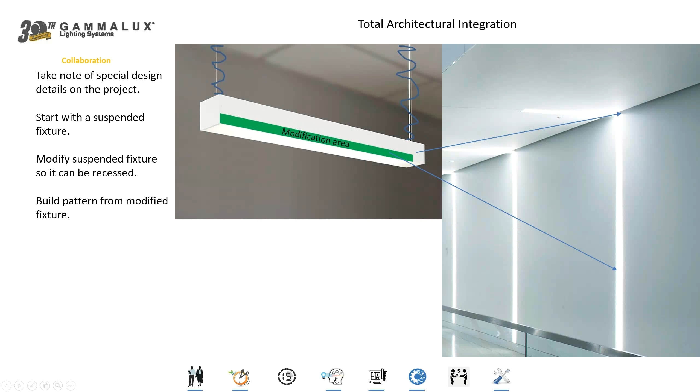So rather than using a recessed fixture in an application like this, what we do is we take a suspended fixture with smooth sides on it, and we modify that suspended fixture so that it could be recessed. But we don't modify the small portion of the fixture that will be visible up inside the little 3-inch gap. And by doing that, we allow for a very clean aesthetic in the space without the problems associated with putting a recessed fixture into an exposed condition.

And of course, the end result is a very beautiful installation, the kind of thing that helps people to build their business and build their reputations. So we try to build fixtures while being conscientious of what's going on in the space. This is why it's very important for us to understand what's happening in that space so we can figure out the right way to modify the fixtures as necessary.

So what ends up happening is sometimes errors are made on the order, and of course this causes delays at the job site, or parts and pieces can't fit together properly because they've been ordered as a bunch of individuals and T or X or L connectors, and they weren't really designed as a comprehensive unit. So because Gammalux tries to deal in totality as comprehensive lighting systems, what we offer to the specifier is something we call a development drawing.

This development drawing is basically the same drawing that we would provide after a purchase order, but we're going to offer it before bid day. And what it does is it takes all of the elements of that comprehensive pattern of fixtures and provides one part number for the whole pattern. And by doing that, we're allowing for the most simple form of ordering possible, because that one part number includes all the various components that are required for that pattern.

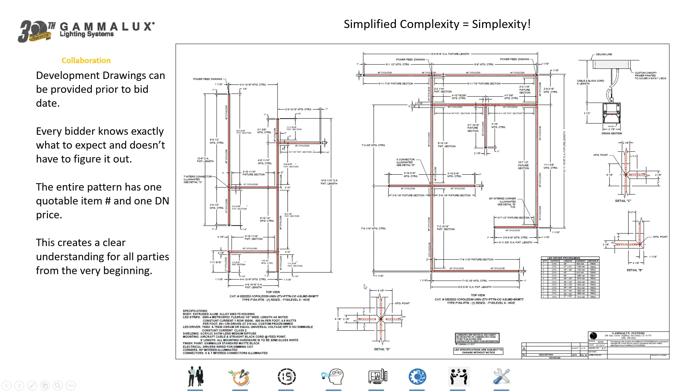Now, another thing this does for you, it simplifies, as I said, the ordering process, and it clarifies to the distributors and contractors who are bidding on this job that this is an engineered lighting system. It's not something that they have to try to put together, and this allows them to possibly do better work by understanding that this is already an engineered lighting system.

Now, everything we build at the factory is actually fully assembled twice before we pack it and ship it. And of course, this affects our lead time.

But it's necessary for us to go through these procedures so that we can ensure that all the housings line up the way that they're supposed to, making sure that all the joining mechanisms work the way that they should, of course, making sure that all the dimensions are accurate.

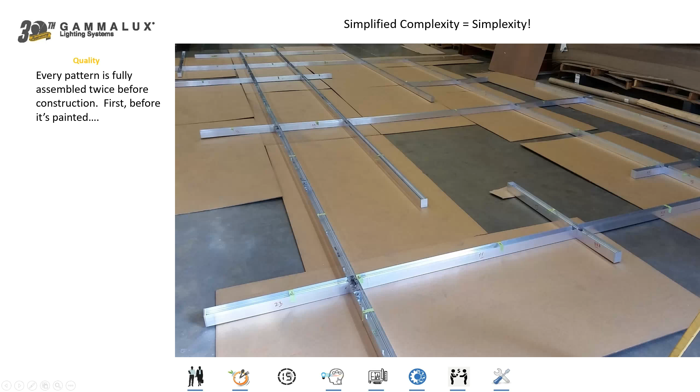Then we take apart that entire pattern of fixtures, paint it, then we put in the electrical and reassemble the entire thing as a comprehensive lighting system, checking every circuit, every battery pack. We're checking the consistency of the paint finish from one housing to the next. So by being very thorough in our methods before we pack and ship the fixtures, we ensure that everything looks and works the way that it should when it arrives at the job site.

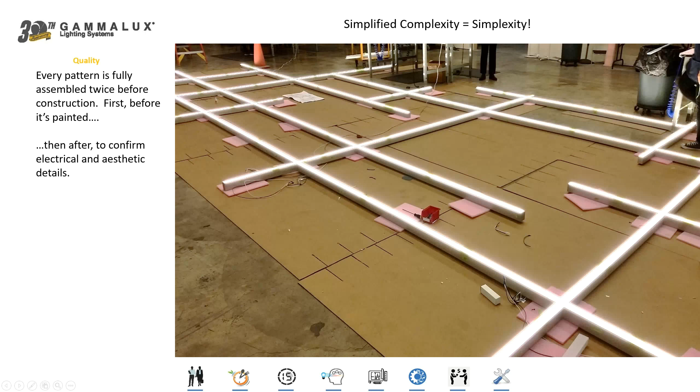Now, if we wanted to embed fixtures into a wall, usually you don't want to see that visible flange that goes around the pattern of fixtures, so you specify fixtures as flangeless. Well, those flangeless fixtures do have a flange, but it's a mud flange. It gets mudded over and painted so you can't see it. Well, we have the same thing as well.

We have a mud flange on our fixtures, but we actually separate that mud flange from our housing by a very small, about a 32nd of an inch expansion gap. Now, this is built in as part of our housing. It's not a separate back box that the contractor has to try to fit together. But by doing this, by building these fixtures with an expansion gap, it allows the housing to heat up from the LEDs or the fluorescent lamps.

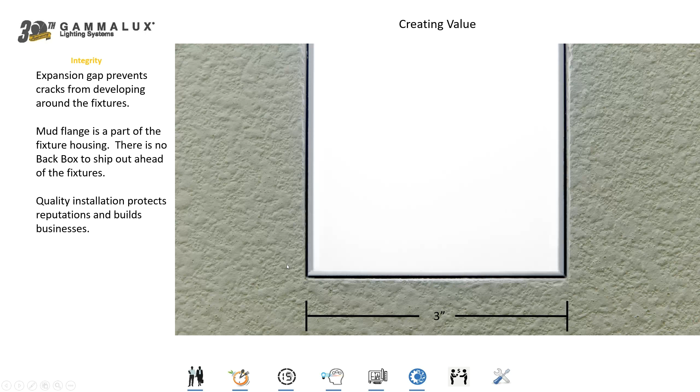It allows that housing to heat up, and when it expands from heat expansion, it doesn't put any pressure on the surrounding plaster. Or if the walls, maybe it's an exterior wall, and the walls are heating up, they're expanding as well. They don't put any pressure on the fixture. So by having expansion gap built in as part of our housing, we eliminate the possibility of those cracks developing around the perimeter of our fixtures. And of course, this helps you to protect your reputation for years to come on those jobs.

So, of course, if the fixtures are built that way, now it's the contractor's responsibility to remove that mud flange in the field, and then they have to cover up holes, and they've got to try to get touch-up paint to make it look pretty again. So what we do at Gammalux is we'll just build the fixture with the mud flange on the sides and the top, but not the bottom. So with proper collaboration, we can understand what's happening in the space, and then we know how to modify the fixture, and we do that at no additional cost.

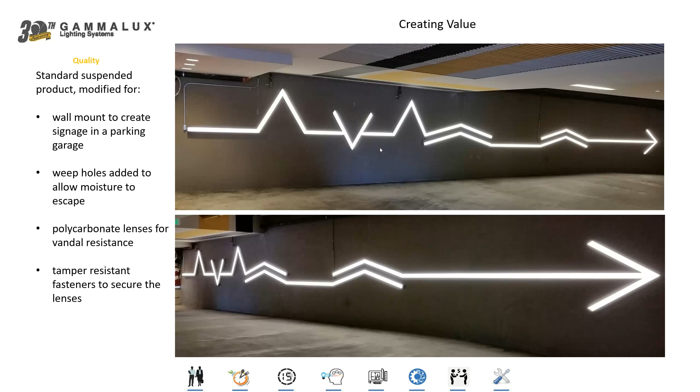We're not bound to 4 foot, 8 foot, 12 foot, or just 90 degrees and 45 degrees and such. We have all this capability. And again, these are not custom applications. Of course, we can make all of our continuous runs fully illuminated. All of our fixtures can be built as either individuals or continuous runs, or even in patterns as well.

Now, when we make these continuous runs, we're not bound to 1 foot or even 1 inch increments. We can actually cut our housings down to very small fractions of inches, and they will always be fully illuminated from end to end. To my knowledge, we're the only manufacturer left that's still able to make a 24-foot single-piece housing. Now, certainly our continuous runs can be built in any length, and there will be multiple housings in those continuous runs. But if you require a single-piece housing up to 24 feet long, we can do it.

Now, also, depending on the size or the shape of that housing, if it's a tall rectangular housing like we have here, it has a lot of rigidity to it. So we can actually support that entire 24-foot housing with just 2 cables. This cleans up the ceiling system, which is architecturally pleasing. It also makes things easier to order because now there's 1 housing to order instead of multiple, and then easier to install. Again, 1 instead of multiple. And you also eliminate the possibility of pinched wires as housings are being joined together. So having the ability to make a 24-foot single-piece housing is one of the things that sets us apart as a manufacturer.

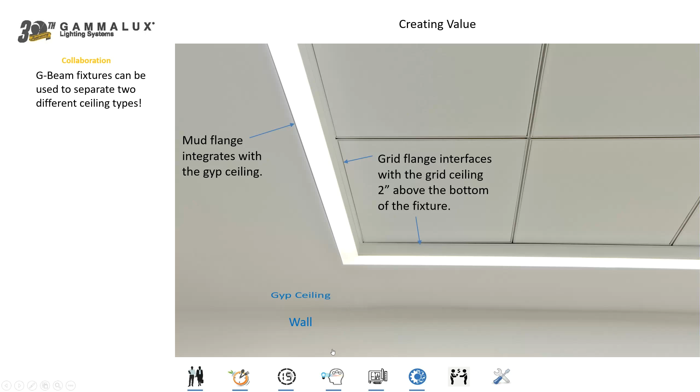Now, we can do this with any kind of ceiling system. It doesn't have to be gyp and grid. It could be metal, it could be wood, it could be stone, it could be poured cement. We can interface with many different types of ceiling and wall materials, even furniture systems, interacting between different elements in order to let the fixtures become an architectural feature and not just a lighting system. Of course, we can make our fixtures into wayfinding devices as well, coming up the wall and across the ceiling. And as you remember, we can do any angle, not just 90s and 45s.

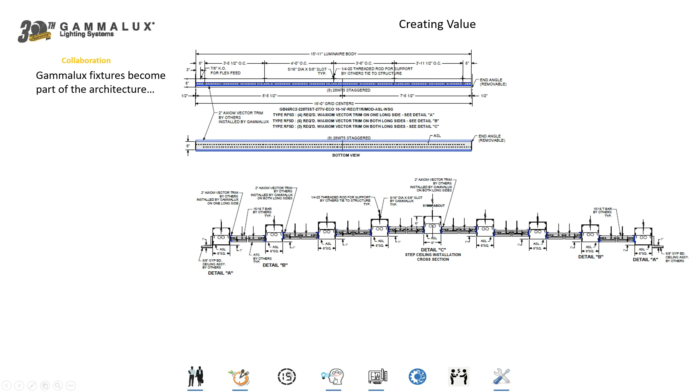In this application, we're making steps in the ceiling, but actually using the fixtures in order to accommodate that. You can see the fixtures are coming up to a point and then back down on the other side. Well, if you think about a step ceiling, there's a lot of complexity involved in that and a lot of question marks and unfortunately a lot of dollar signs associated with that kind of thing. But it doesn't have to be that case. See, what we did is we found out what the ceiling system is.

In this case, it was the Armstrong Axiom ceiling system, which uses an extruded aluminum C-shaped channel up against the walls. And of course, the grid slides along that C-shaped channel and then into the proper positions, and then the tiles are dropped into the grid.

So what we did is we got a hold of that C-shaped channel called the vector trim, and we attached it on the sides of our fixture at 2 different heights at the factory. Everything was cut to the same length, and then it was painted together so it all looks like one comprehensive element. Now, when the fixtures are installed in the space at the height and spacing that they're supposed to be, then the ceiling contractor gets there and just snaps the grid directly into the sides of the fixtures.

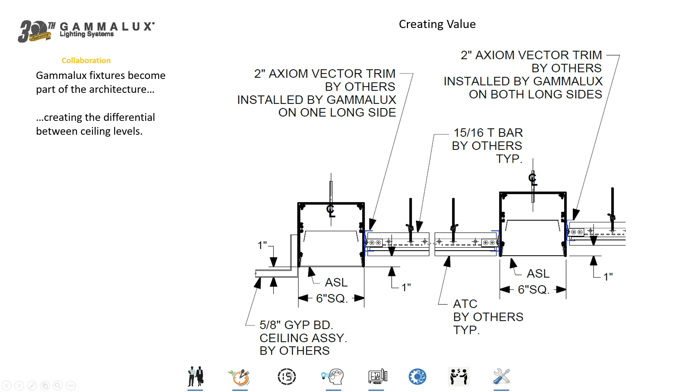The grid and the fixtures are independently supported, so they're not relying on each other, but still they interface with each other so that you have a very clean aesthetic and a beautiful installation in the space without all the dollars associated with custom construction.

At the end of that job, the contractor sent congratulations back to the lighting designer, who insisted on using Gammalux because we are into the fine details. We have the conference calls necessary with all the players to ensure that we have all the proper information so that we can build fixtures properly and allow the installation to look good.

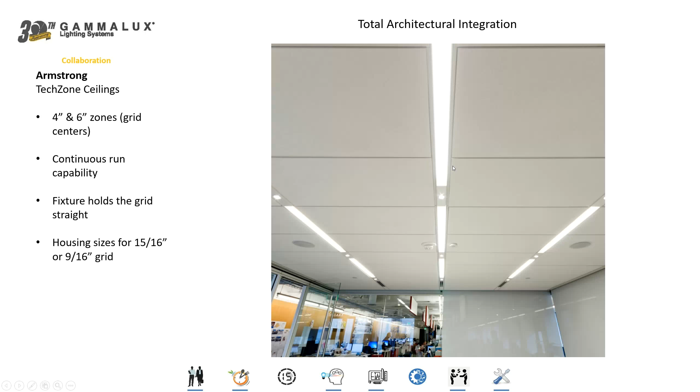Here's the Armstrong Tech Zone ceiling. We can interface with either the 6-inch or the 4-inch Tech Zones. And also in the 4-inch Tech Zone, because our housing is so rigid, we can make continuous runs without the need to break up the runs with the joiner yoke that holds the grids together. So our fixture actually takes the place of the joiner yoke and helps the grid to maintain straightness.

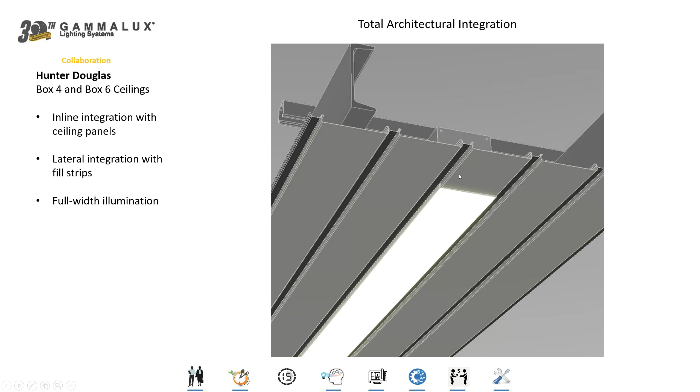This ceiling system here is the Hunter Douglas Box Series ceiling system, where they have the Box 4, nominal 4-inch, and the Box 6, nominal 6-inch. We've made our fixtures the same width as the panels, and we've given a spline at the end of our fixture to interface with cut panels in line with our fixtures. We also use the same brackets on the top of the fixture that the panels use, so the installing contractor doesn't have to learn anything new. So we're very much into providing the kind of components that are necessary to allow the installers to do their best quality work as quickly as they possibly can.

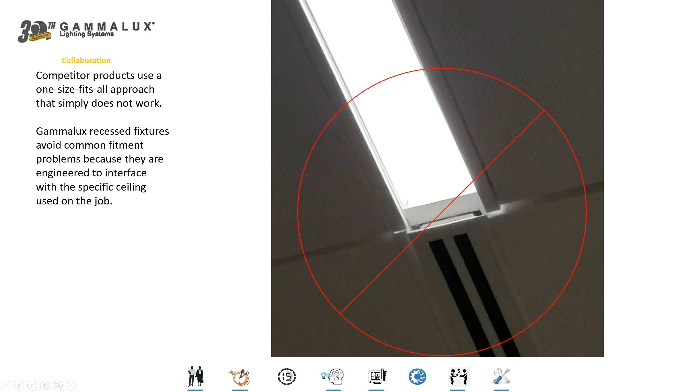Obviously, you have to avoid this kind of thing, these one-size-fits-all solutions that don't fit all. One size fits one, and the rest are compromises. So we don't offer fixtures like this. We always want to know what's the grid, what's the ceiling system, so that we can interface properly with that particular ceiling.

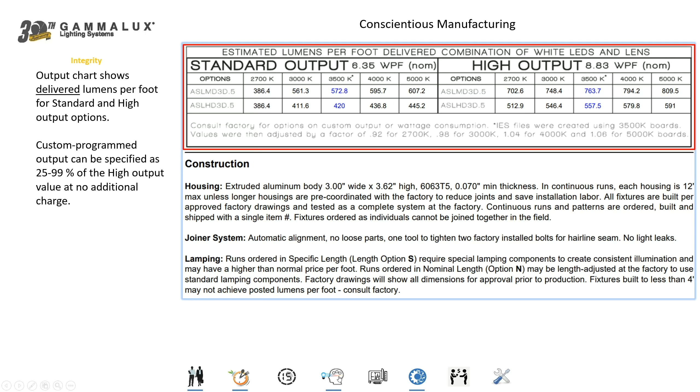Now, when you're running lighting calculations, obviously accuracy is important. So our table of output actually comes down to tenths of a lumen per foot. And so we provide these numbers for our standard output fixtures, our high output fixtures in all 5 color temperatures that we offer, with both the medium diffuse and the heavy diffuse lenses. So we always want our numbers to be as accurate as possible.

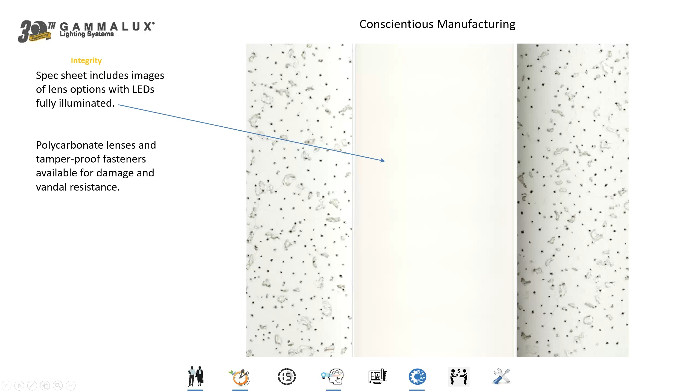As a matter of fact, we do something that nobody else does. We actually show you an image of what the bottom of our fixture looks like as you're looking through the lens with the LEDs fully illuminated behind. See, everybody has that glamour shot of the fixtures in their best condition, and that's wonderful. But nobody ever shows you what the products actually look like when you're sitting at your desk looking straight up at the fixture, straight through that lens. We do, because we want you to understand not just the performance of the fixture, but also the aesthetics.

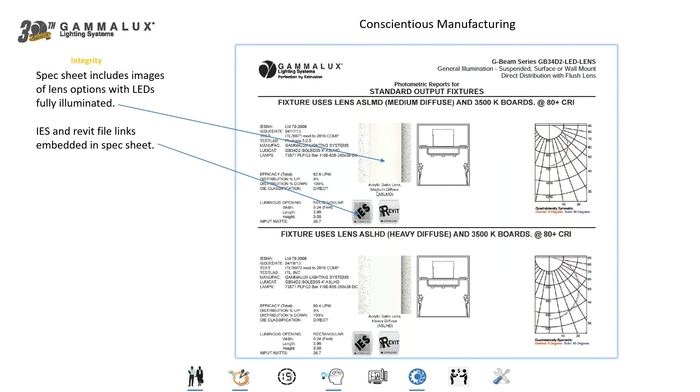And right next to that image in our specification sheet, there's the hot link for your IES file. There's your hot link for your Revit file. So you don't have to waste your time going to our website and finding the zip file that has all the IES files, and now you're playing catalog number bingo trying to figure out which one is the right IES file. They're all right there in the specification sheet, easy for you to download.

Now, we offer fixtures of multiple widths from 1.5 inch wide to 8 inches wide. And so if you have fixtures of multiple widths in the space, they're going to have different output levels. What we can do is custom program our fixtures at no additional cost so that you get the same apparent brightness from all the fixtures in the space. And we do this because, of course, we want consistency throughout the space. And like I said, we do that at no additional cost when it's requested.

Now, in addition to flat lenses on the top and the bottom of the fixture, we also offer 3-dimensional lenses, which drop or rise 1/2 inch from the housing, and that's in suspended fixtures as well as recessed fixtures. And that's in our widths of 1.5 inch to 4 inches wide.

In addition to 3-dimensional dropped lenses, we can also make regressed lenses. And because of the way that we build our fixtures, we can actually vary that dimension at the factory, of course. It's not field adjustable. But we can set that dimension at whatever the specifier would like. Maybe they want a 1/4 inch regress, or 3/4, or 3/16, or 2.5 inches. Whatever it happens to be, we can modify our housing to allow for the lens to be regressed up inside the housing at basically whatever dimension they would like.

We also offer damp location fixtures. We don't do any wet location fixtures or anything capable of natatorium use, where the chemicals in a pool room are eating through the housing. But if all you need is damp location, maybe there's a lot of moisture in the air like there is in Seattle, obviously we don't want that condensation to cause problems inside the fixture, so we will modify the fixtures at the factory for damp location capability.

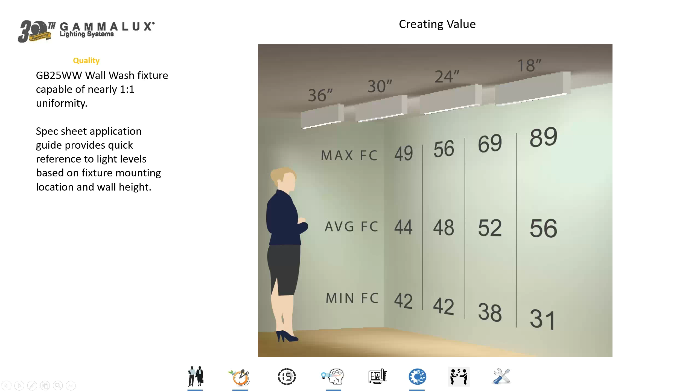Wall washing is a very important part of good lighting design. Obviously, if you need a wall washer, there's probably something important happening on that wall, and we want to illuminate that wall as evenly as possible. So with our wall wash fixture, we actually have a kick reflector on the bottom, which allows the top of the wall to be fully illuminated with no shadows. Not all of our competitor products have that, and then you end up with shadows at the top of the wall. Also, the kick reflector acts as a glare shield, so the people in the room aren't looking up inside the fixture, which can be quite unappealing.

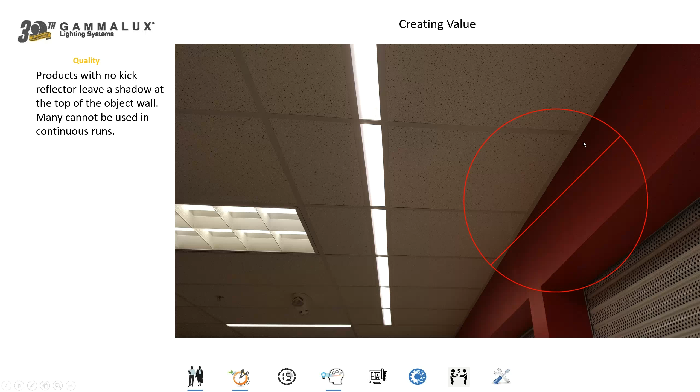Now, of course, because we can build our fixtures to any length, you can go wall to wall with the construction of our fixtures down to 1/256 of an inch for a nice clean aesthetic in the space. This is one of those competitor fixtures that does not have the kick reflector on the bottom, and you can see very clearly it creates a very visible shadow at the top of the object wall. So we want to avoid that. Our wall wash fixture can be built as individuals or in continuous runs and even in complex, fully illuminated patterns.

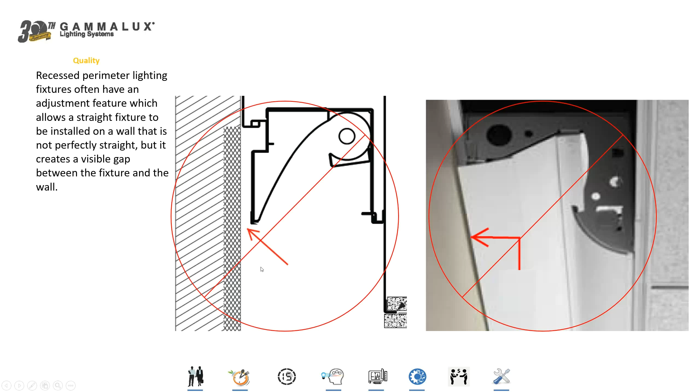In the world of perimeter lighting systems, we've done a few things that no other competitor has done. For instance, we've eliminated the gap between the back of the fixture and the wall. This is very important because this is the most visible portion of the fixture when you're sitting in the space looking up inside those perimeter lighting systems and you see this gap between the fixture and the wall. It's quite unappealing. So what we've done is we've eliminated that gap by creating a mud flange that gets mudded over on the face of the wall.

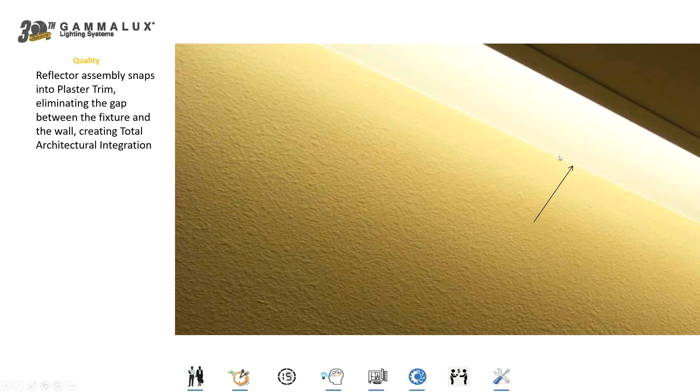And that mud flange has a little groove which receives the reflector assembly from our fixture. So the end result is when you're sitting in the space and you look up, you see that the reflector just dives into the apparent surface of the wall. It's quite beautiful. And this is consistent throughout the entire space.

Now, we offer two types of illumination with this fixture. We offer grazing illumination, where we're shooting light straight down the wall. And of course, this grazing illumination obviously needs a very tight candlepower curve, so we create that with a semi-specular aluminum reflector in a parabolic shape and a reflective lamp barrier that keeps light from hitting the direct top of the wall and instead bounces that light into the top of the reflector so it can be shot straight down.

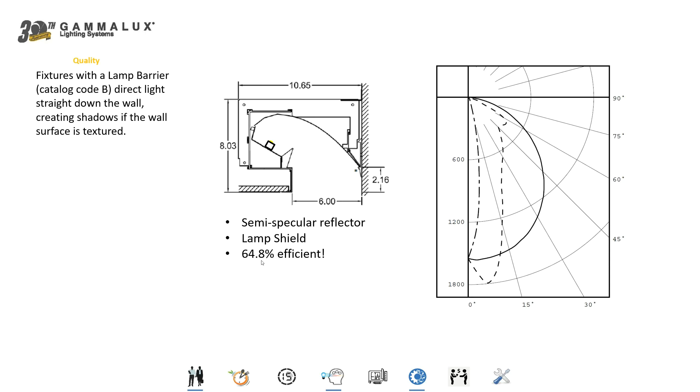This fixture is nearly 65% efficient, which doesn't sound like a lot, but the next closest competitor is the Light Control Wall Slot 2000, and it's only 43% efficient. So we're talking about getting usable light out of a fully grazing illumination fixture. Also, notice the height of that lamp barrier. The cutoff angle is right here, so if you have a shiny tile or a mirror on the wall, you'll never see the reflection of the lamps on that wall material.

Now, you have to be very careful about grazing imperfect walls. We recommend that if you're going to use our wall grazer, that you use it either on a textured wall or brick or stone or some type of scalloped material, but never on a flat wall unless you know that wall is perfectly flat, like a level 5 finish. If it's not perfectly flat, you're going to see every dimple and pimple on that wall, so we want to avoid that.

We've also reintroduced the round fixture into the world of lighting. It was gone for about 15 years or so, but we've given this rotation capability now so that the fixtures can be aimed to wherever they need to be in the space. And so round fixtures are just a wonderful geometric shape and very important as part of good design.

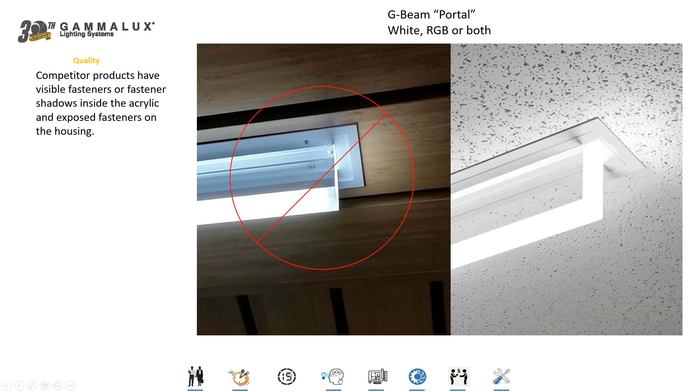Our G-beam portal fixture is quite a dynamic product. It uses our standard G-beam housing above, but rather than having a flat lens on the bottom, we replaced that with the backlit acrylic. Now, this backlit acrylic is quite beautiful. It's not like our competitor where they've got visible fasteners on the fascia of the fixture and actually fasteners visible through the acrylic itself. We have a very nice, clean aesthetic on the bottom of our fixture, and of course, since we were not first to the market, we believe that we had to be a bit better aesthetically.

These fixtures can be built as individuals or in continuous runs. In a continuous run situation, there will be a small gap between the acrylic blocks. They can be built into gyp ceilings, grid, metal, wood, stretched fabric, you name it. So we have all those capabilities. We have 12 different models of the acrylic blocks ranging from 1.5 inches wide to 1/2 inch wide, from 1 inch exposed to 3 inches exposed, and from 3 sides frosted to 5 sides frosted, so a total of 12 models there.

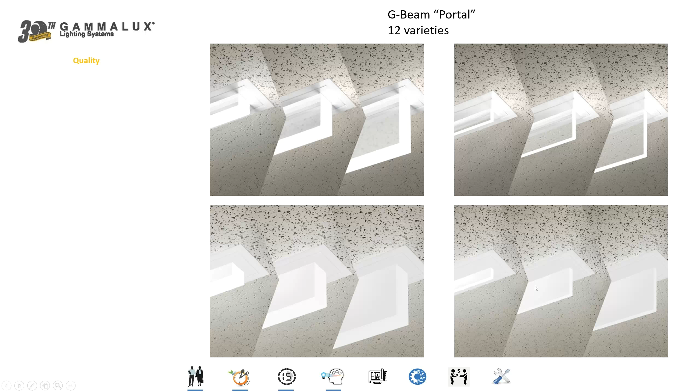In all of our LED fixtures, we offer RGB control as well as RGB plus W, where the white circuit is a separate circuit so that you get full output out of that white. We have 13 standard finishes in all of our fixtures, and we also offer wood grain finishes in our fixtures as well for a very nice and warm type of aesthetic.

The moral of the Gammalux story is architectural integration, and we hope that you see that we execute that well.